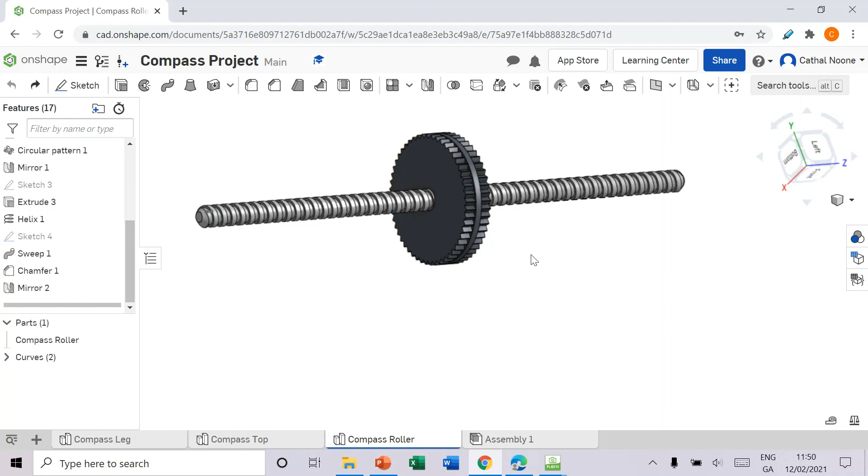Okay folks, so in the last video we had a look at how to make this compass roller, and in this video now we're going to look at two new parts.

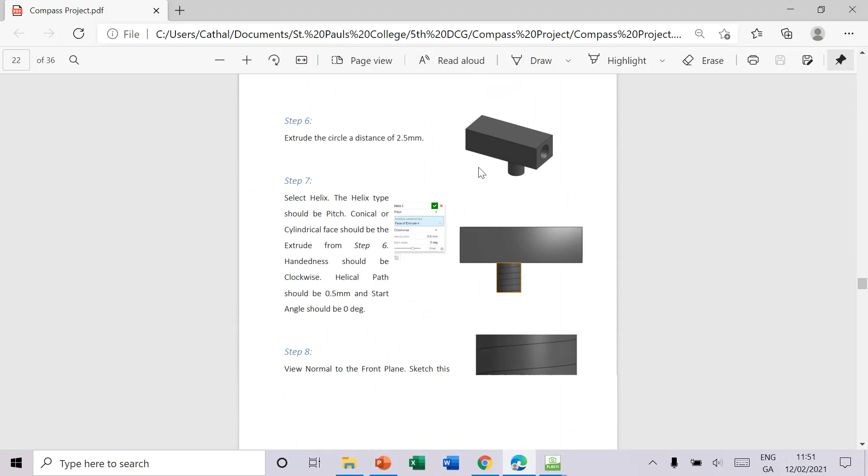So part 4, which is the lead holder, and part 5 then, which is the lead wheel that's going to attach to the holder. Okay, so as usual we're going over to our compass project and we're going to open up a new part studio.

So create part studio, and we're going to be greeted by the 3 planes and the origin. So the first thing I want to do here now again is just to rename this, and I'm going to rename it after part 4, which is lead holder. So rename lead holder.

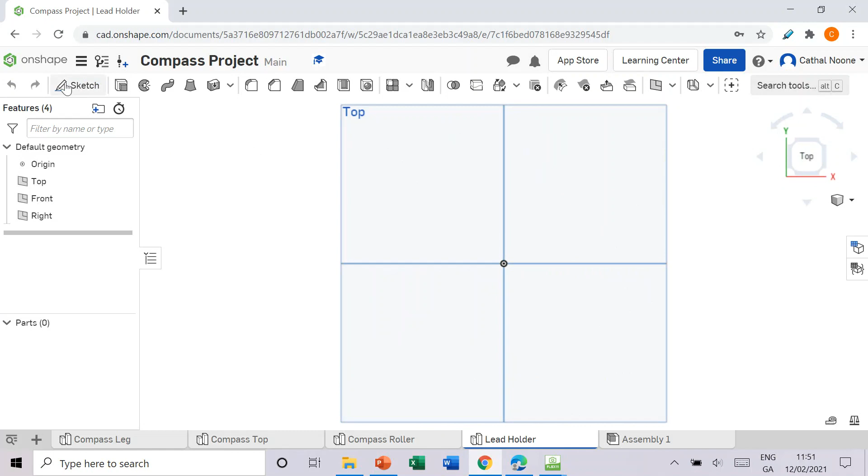Okay, and I'm going to start here now with step 1. So sketch the center rectangle on the top plane, 10 mil by 4 mil. So looking straight in at the top plane, I'm sketching onto the top plane a center rectangle, and that's going to be 10 mil by 4 mil.

Okay, so the shape then turns black once it's fully defined. Green tick. So that's step 1.

Step 2 is to extrude that sketch by 3 millimeters. So I'm going up here to the extrude feature, and I'm going to extrude this sketch by 3 mil. And make sure you hit the green tick once you're done.

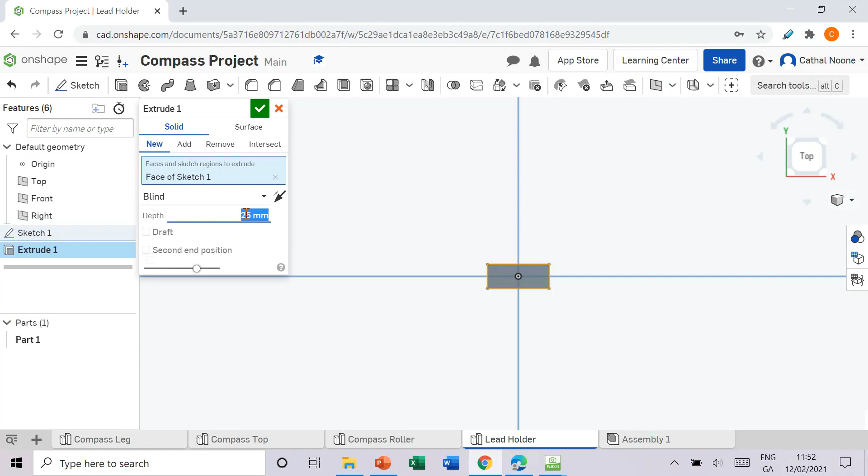Okay, so you can see now we have a cuboid shape here, and we'll be moving on to step 3. So all very basic so far. Look normal to the left of the shape and sketch a radius 1 millimeter circle on the center of that surface.

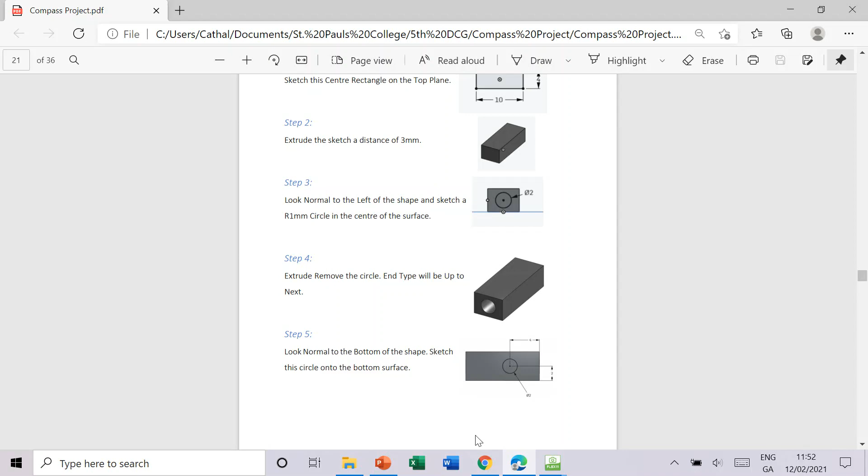Okay, so if we go over to our shape here, we can see we have looking in at the right, and we also have looking in to the left. So we're asked here to look in at the left, and we're asked to sketch onto that surface, sketching a circle.

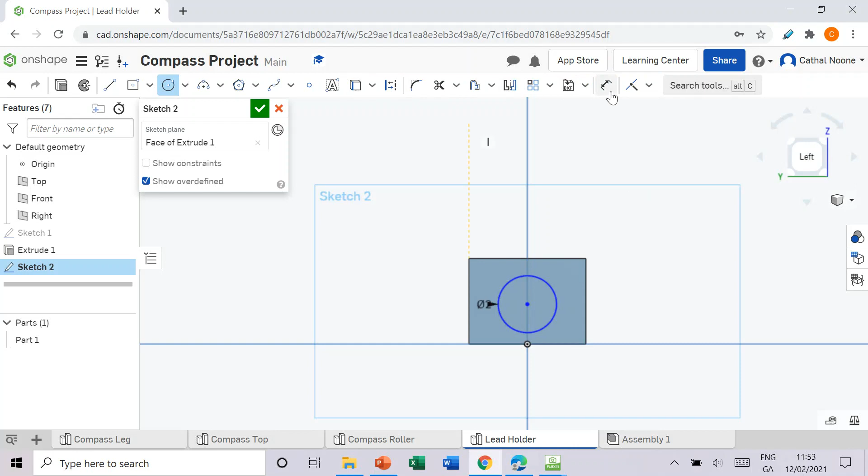Of radius 1 millimeter. So I can go up here now to dimension that, and it's going to be a diameter of 2. The final thing I want to do is make sure that that's centered on the shape, so the distance from here to here should be 1.5 mil. Okay, green tick once we're finished that, and we can see now that we've sketched onto that shape, that circle.

Okay, step number 4, extrude, remove the circle. End type would be up to next. So I'm going up here to extrude again, and I'm extruding this shape.

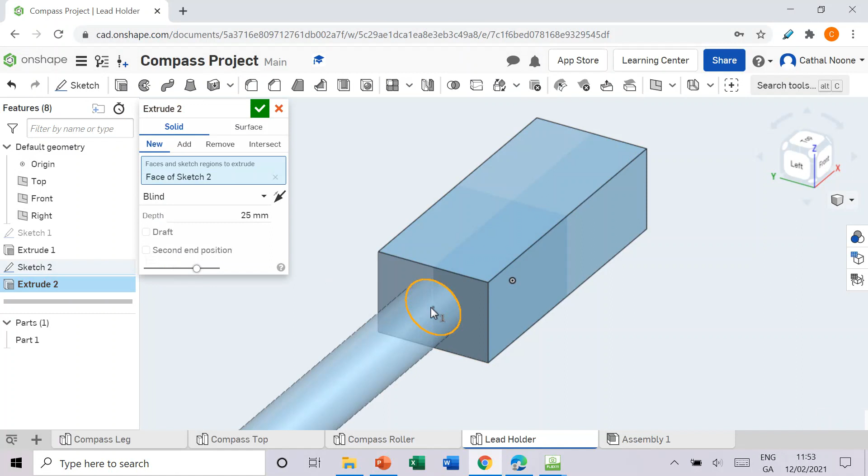And by default now, it's extruding and adding. I don't want to add, I actually want to remove, so make sure you're clicking the remove button. And they said that the end type was up to next, so it's going to go up to the next surface, which is the surface here on the other side. Green tick once we're finished that.

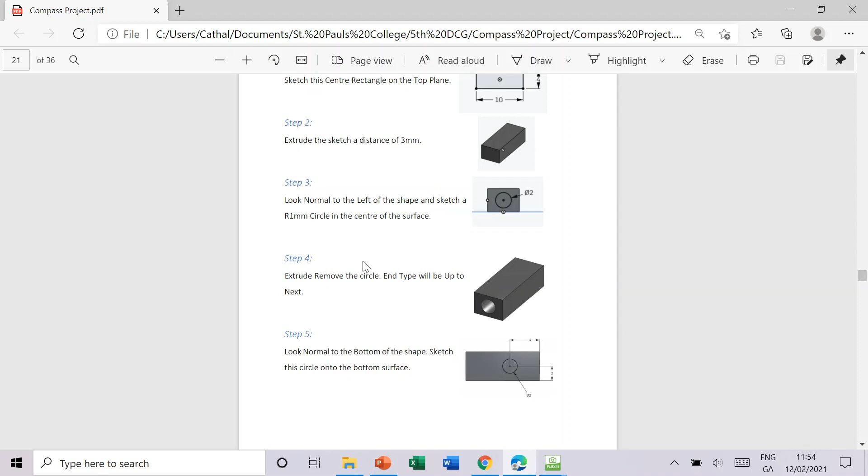Okay, back to our document. Step number 5. Look normal to the bottom of the shape and sketch this circle onto the bottom surface. So we see here again we have this diameter 2 circle, that's 4 mil away from this edge and 2 mil away from this edge.

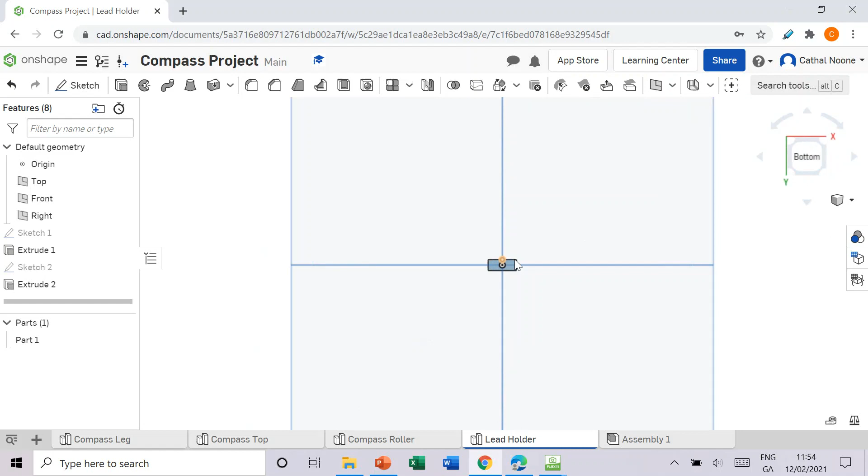So again, looking at this shape here, we want to look straight in at the bottom, they're saying. Okay, so when we look at the bottom, this is what we see, and we know that we want to sketch a circle onto this.

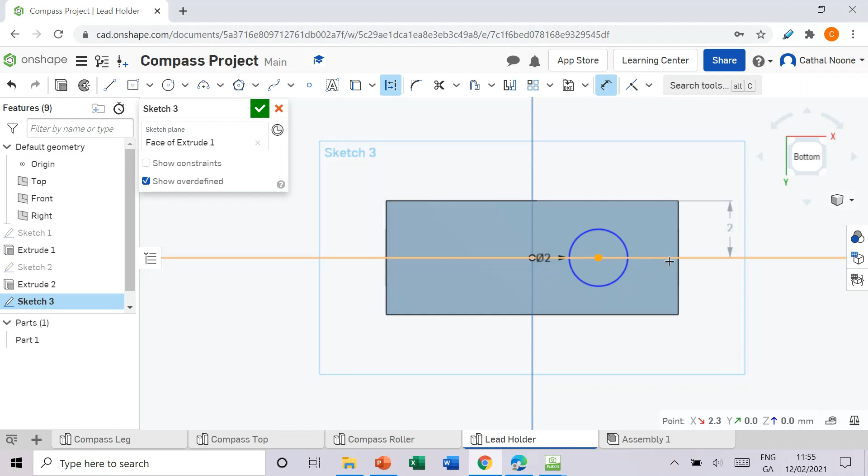So again, the diameter of that circle is 2 mil. The distance from here to here is 2 mil, and the distance from here to here, as far as I remember, was 4 mil. Okay, green tick once we're finished that, and now we see that we've drawn a circle onto that bottom surface.

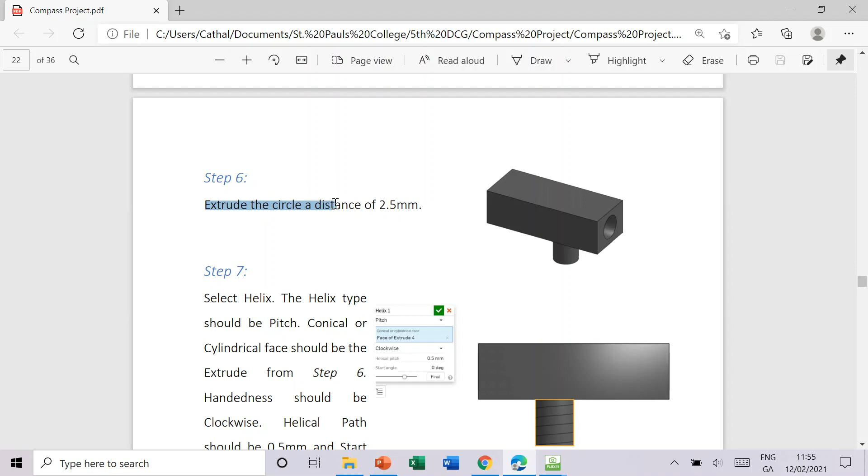Step 6 is to extrude the circle a distance of 2.5 mil. So grabbing that circle, pressing extrude, and extruding it by 2.5 mil. So we're adding this time, not removing, and we're going to get a shape like that coming out at the bottom of it.

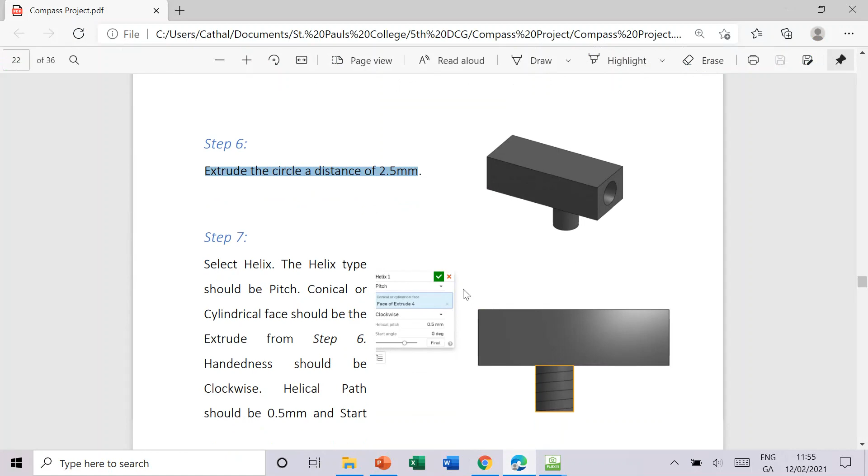Okay, step 7 is to select helix. We know where that is from the previous videos. The helix type should be pitch, conical or cylindrical face should be the extrude from the previous step, which was step 6. Handedness should be clockwise, helical path should be 0.5mm, and start angle should be 0 degrees.

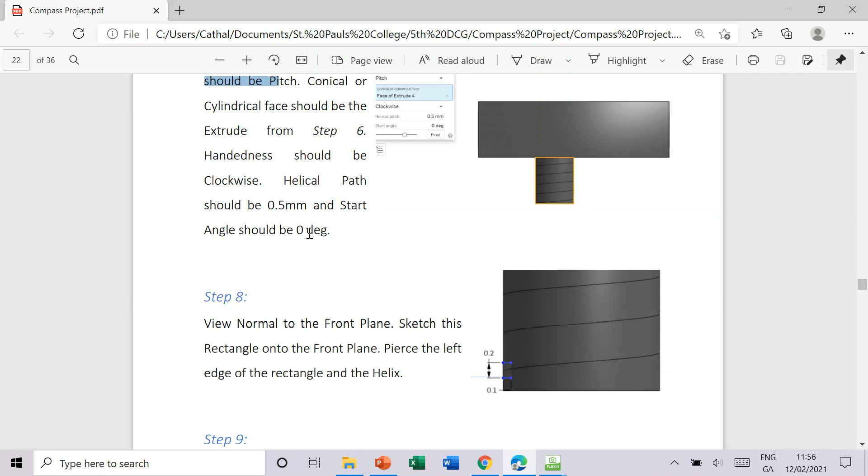Okay, so a lot of information there, but we're going to go here to helix, plane, and selecting this as the conical surface. And we see we'll start to get a helix there.

Next thing we want to change is that it's not turn, we want to change the pitch, and we want to change that pitch to 0.5mm. Okay, so we get a nice tighter helix here.

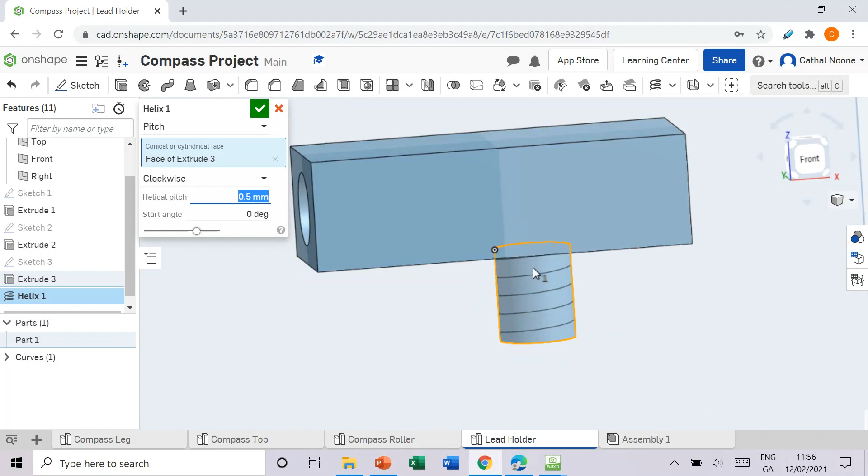Okay, so the lower that number gets, so if we start bringing that down to say 0.01, the tighter together them curves will get. But we want it to be 0.5. Okay, so that looks pretty good to me.

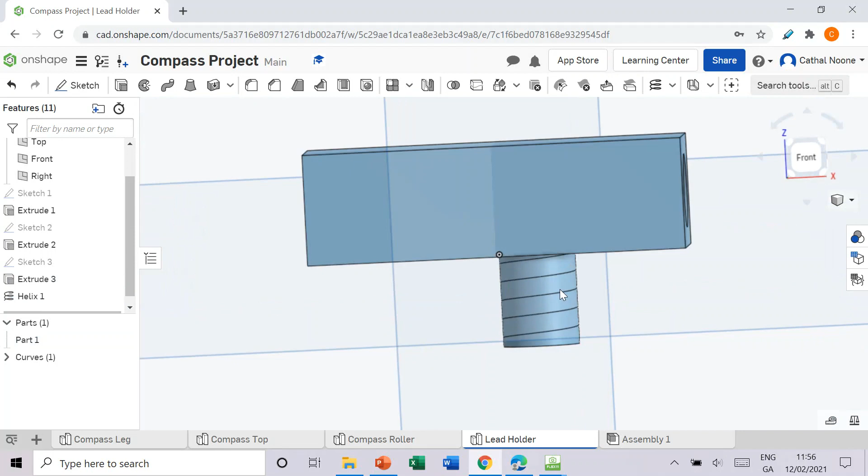View normal to the front plane and sketch this rectangle onto the front plane. Pierce the left edge of the rectangle and the helix. Okay, so we have a 0.2 by 0.1 rectangle there.

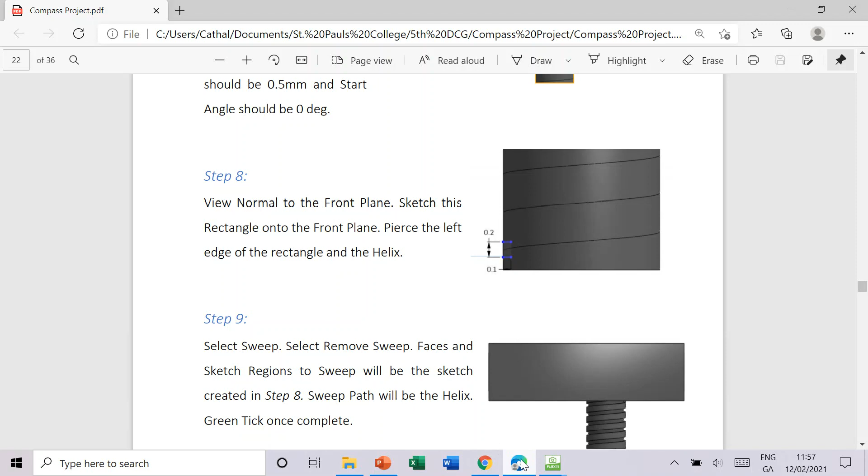So what we want to do is go normal to the front plane, and we're going to zoom in. We're zooming in to this spot here, over to the left side of the shape where the bottom helix is. If we see the curve, it's kind of starting here and it's going to go over to this point, and this is the point we're looking for.

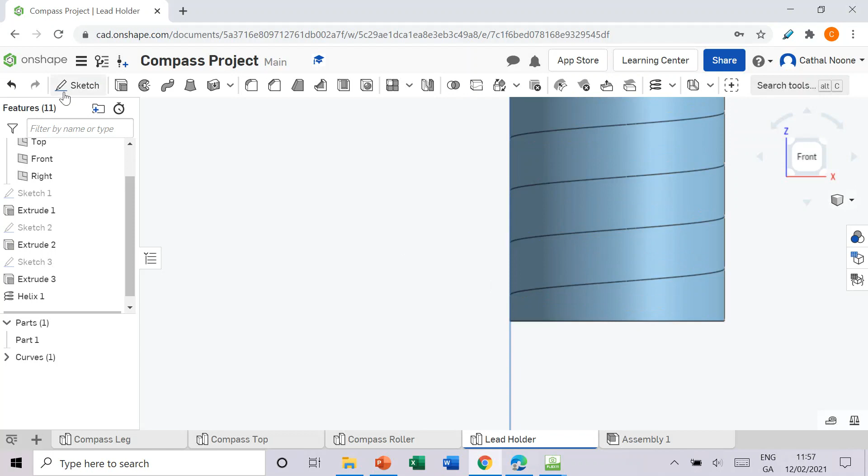And we want to sketch here, onto the front plane. What we're sketching is a corner rectangle. So zoom in here good and close for yourself, and I want to just sketch a corner rectangle like that. That's going to be 0.1 by 0.2.

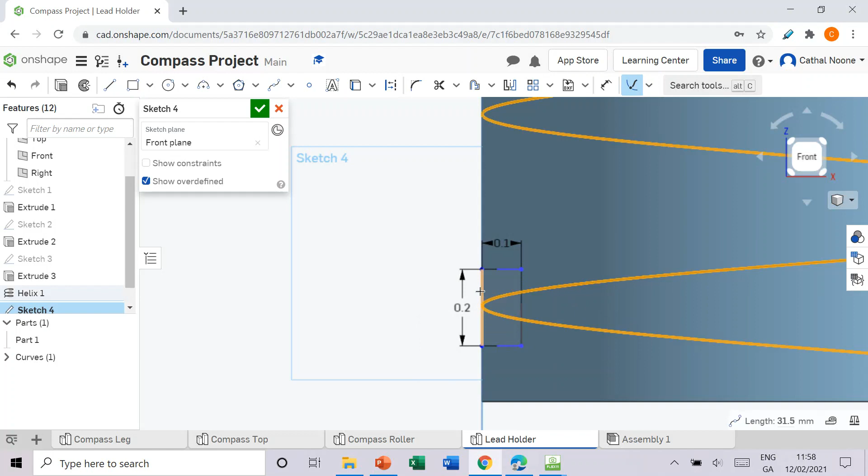The next thing I want to do is choose this feature here, which is pierce. I want to pierce this line with this edge here. And they're going to now pierce each other, which means that this helix and this line are actually joined together now.

So I'm going to get out of that relation, and I'm just going to center up this by eye. This doesn't have to be all that accurate, but just center up that line with the helix. Once you have it centered, you could dimension this if you want to 0.1, but I'm just going to leave it like that. Okay, so that's nicely centered for me. Green tick once I'm finished that sketch.

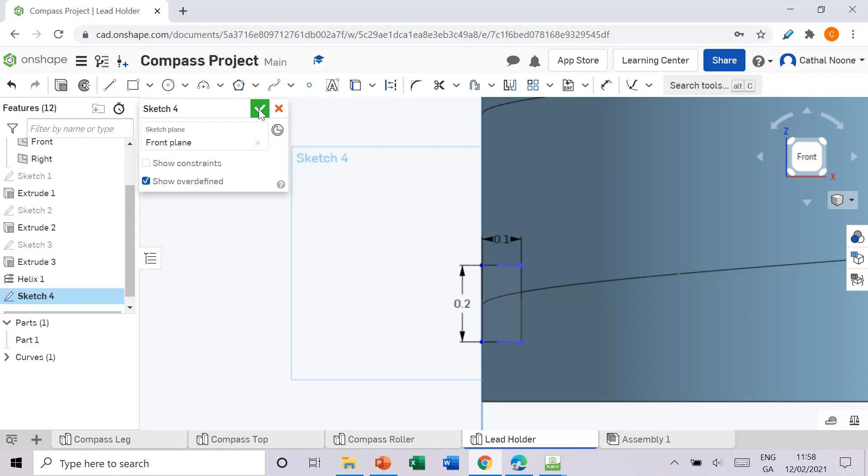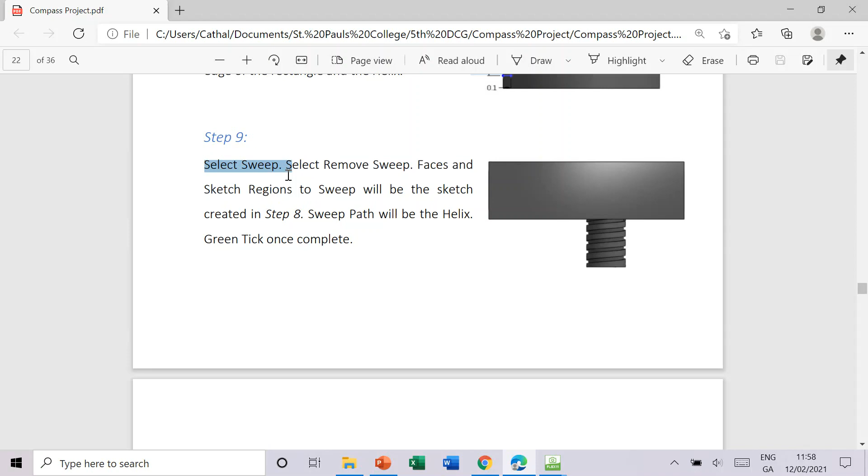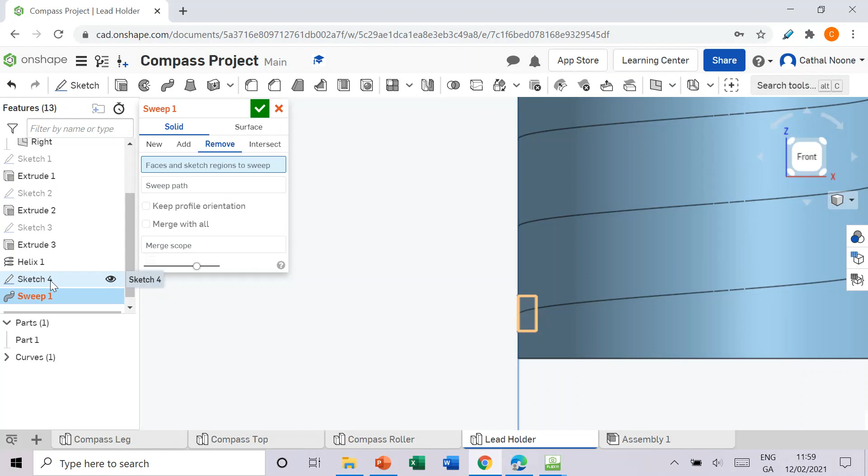Step 9 is to select sweep, select remove sweep. Faces and sketch regions to sweep will be the sketch created in step 8. Sweep path will be the helix. Green tick once completed. So we're going up here to this feature, sweep, and we are going to remove. The faces and sketch regions to sweep will be this sketch from the previous step. The sweep path will be the helix, and green tick once we're finished.

So you can see now we have it's kind of like a thread on a bolt. One thing I like to do now is just to hide the helix curve. Okay, so we're left with this.

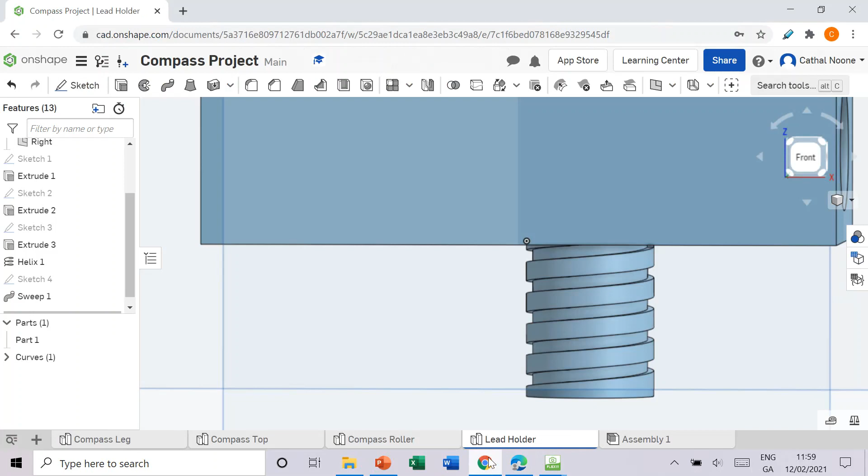Chamfer the end of the sweep. This chamfer distance should be 0.1mm. So chamfer is this tool here, and I'm just chamfering this very bottom surface here, or the edge even. The distance we said was going to be 0.1mm, and that's just going to kind of grind down the bottom of that screw. You'll often see that.

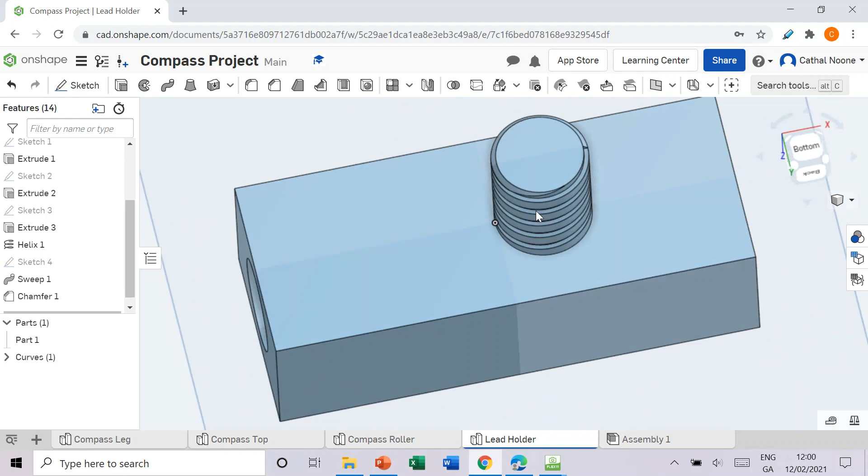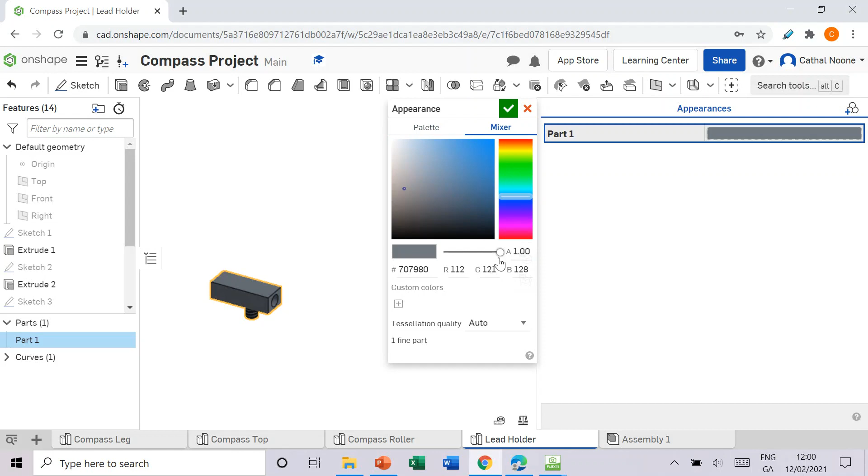The last piece, step number 11, is just to edit the appearances of that object. One thing I like to do is just to hide the origin and the 3 planes, and then over here to appearances, double click on the current color, which is this blue, and I'm just going to change it to a darker shade of grey. You also have this Palette, Mixer as well that you can go through, and you can get whatever colour you like to colour it.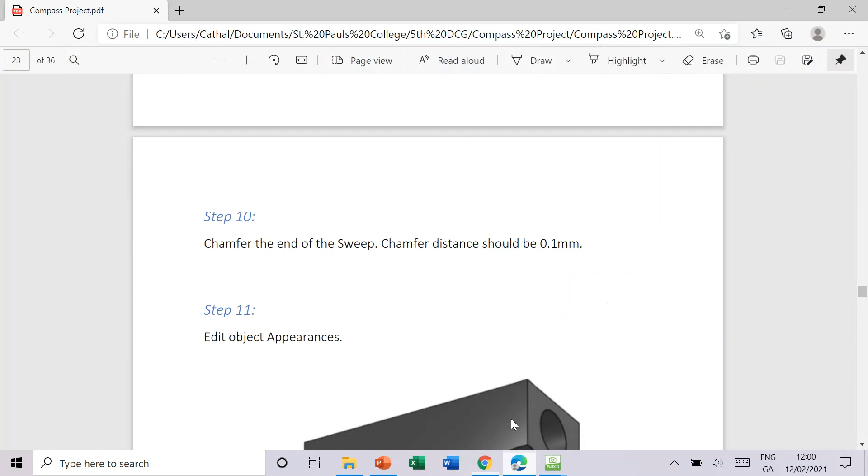And that is the lead holder now finished. So again, we're going to do 2 parts in this video, and the next part we're going to do is part number 5, which is this lead wheel.

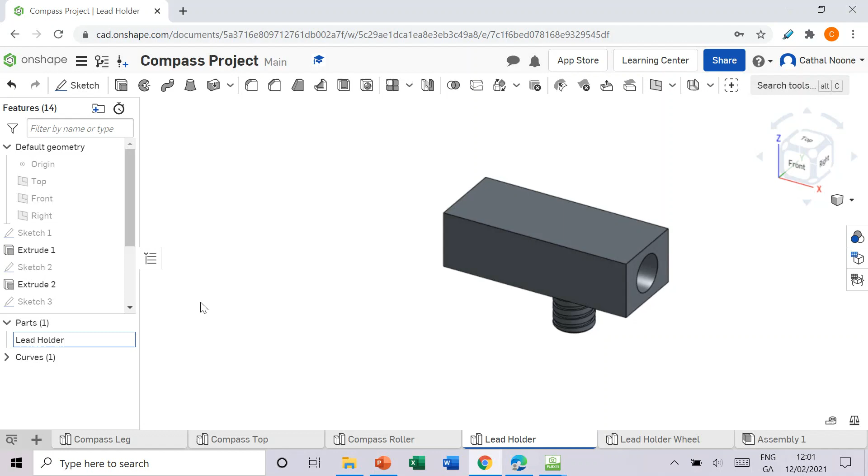So before we begin that, we need to open up a new part studio and rename that compass or lead holder wheel. One thing I also do is, because this is called the lead holder, I'll also change this to lead holder as well. Okay, so lead holder wheel.

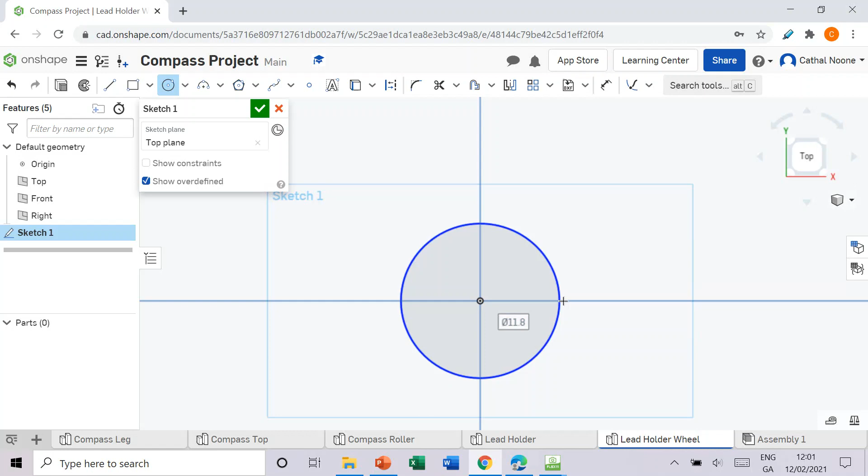Step 1 is to sketch a radius 2.5mm circle with the origin as its center. Okay, so that's going to be a diameter 5. So sketch onto the top plane a circle with a diameter of 5. Green tick once we're finished that. Extrude, so step 2, extrude the circle a distance of 2mm to create a cylindrical shape.

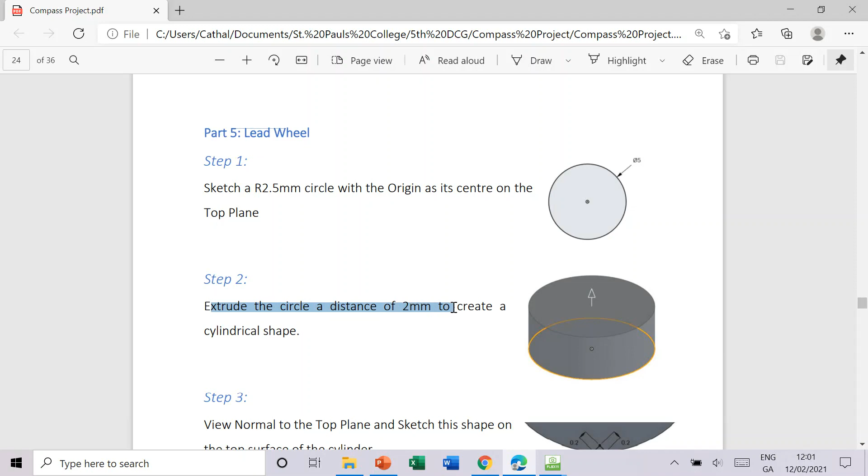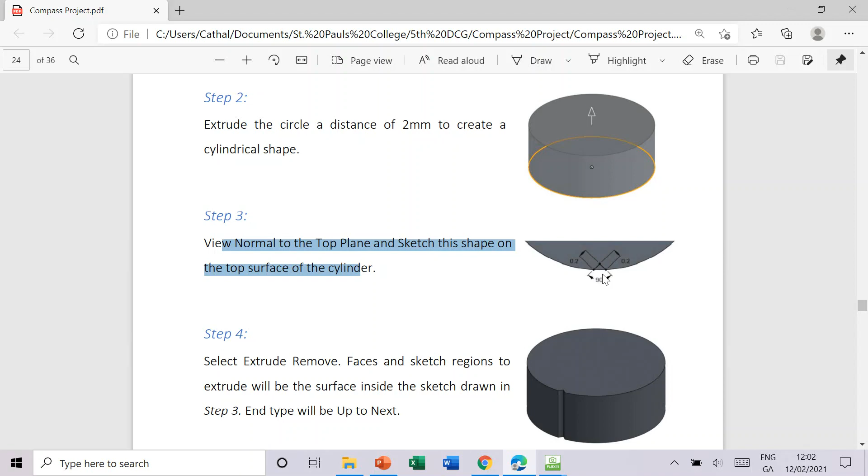Okay, and we're going to get a shape like that once we extrude it by 2mm. View normal to the top plane and sketch this shape onto the top surface. So we have 0.2, 0.2, and 90 degrees here. Go normal to the top and start a sketch.

So we're sketching onto the top plane and we're going to sketch a line. I'm going to start just down here on the circumference anywhere at all, and I'm going to bring it up until I get the indication that it's on the center line. Once I get to the center line, I'm going to click and move down here to the right, and draw another line.

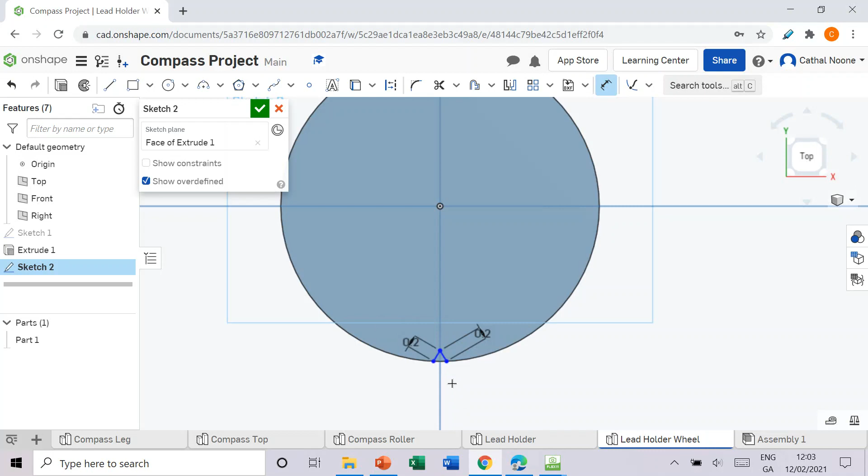Using the Smart Dimension tool, I need this to be 0.2, and I need this to be 0.2. The final thing I want to do is dimension the angle in between, and that angle is going to be 90 degrees. Green tick once we're finished that sketch.

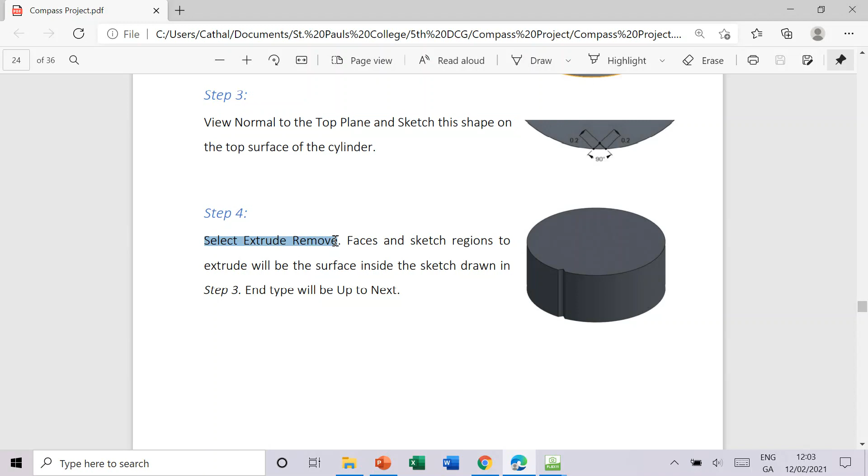Step 4, select extrude remove. Faces and sketch regions to extrude will be the surface inside the sketch drawn in step 3, so inside this surface here. The end type will be up to next, so we're going through the whole shape here.

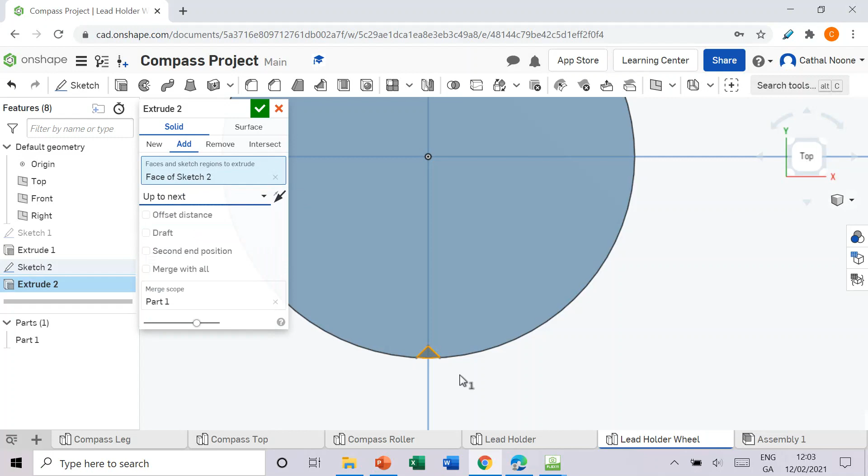So I'm going to click extrude and select this surface here. End type is going to be up to next, so that's going to go all the way through this shape once I press remove. Green tick. Okay, so we can see now we have a cutout of this cylinder.

Select circular pattern. Select feature pattern, which is important - make sure you're picking feature pattern, it won't work unless you pick this one. The feature to pattern will be the extrude remove created in step 4. The axis of pattern will be the circumference of the cylinder created in step 1. The instance count will be 55. Select equal spacing.

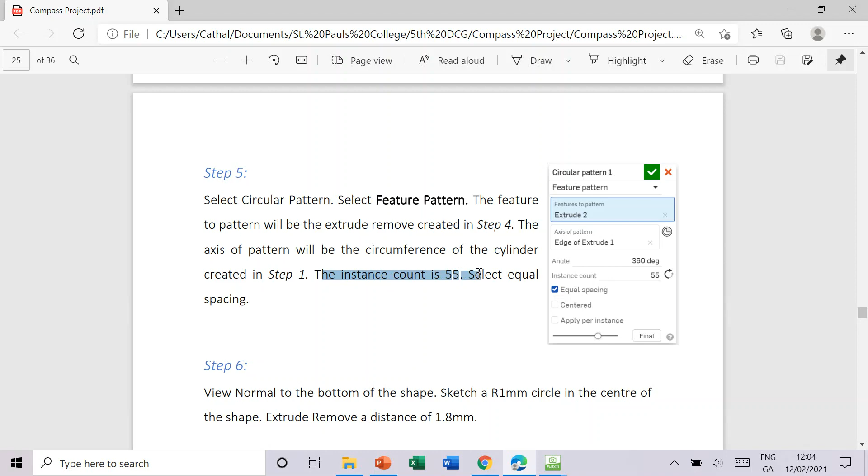So we need to go here to our linear pattern and click the drop down menu to find circular pattern. The very first thing we do is change this part pattern to feature pattern. Features pattern would be the extrude cut from the previous step. The axis of pattern would be the circumference of the cylinder.

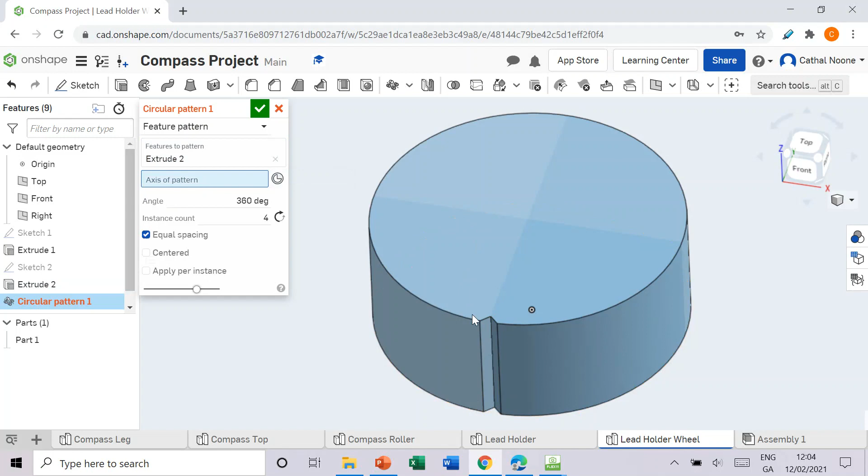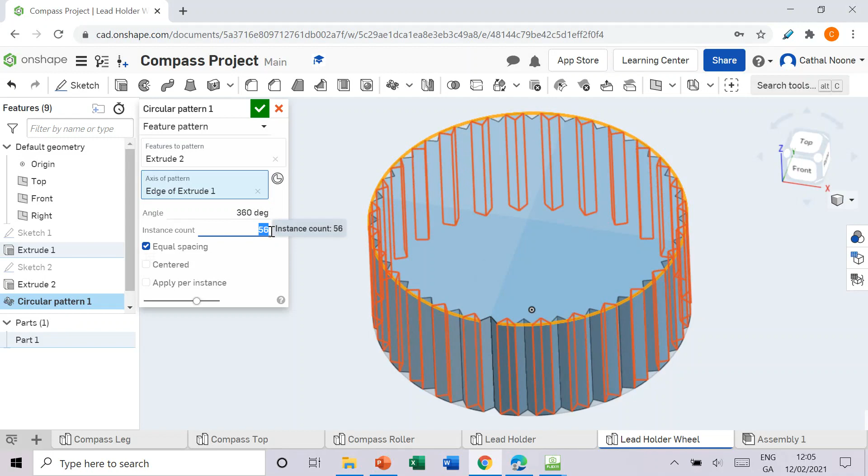Okay, we see now that we have 4 cuts made. We need to start increasing that - the more cuts you add, the more cuts that will appear. And I want to change that to 55. 55 is the max amount of cuts we can make there before it becomes an incomplete pattern, so 55 there is the most we can do.

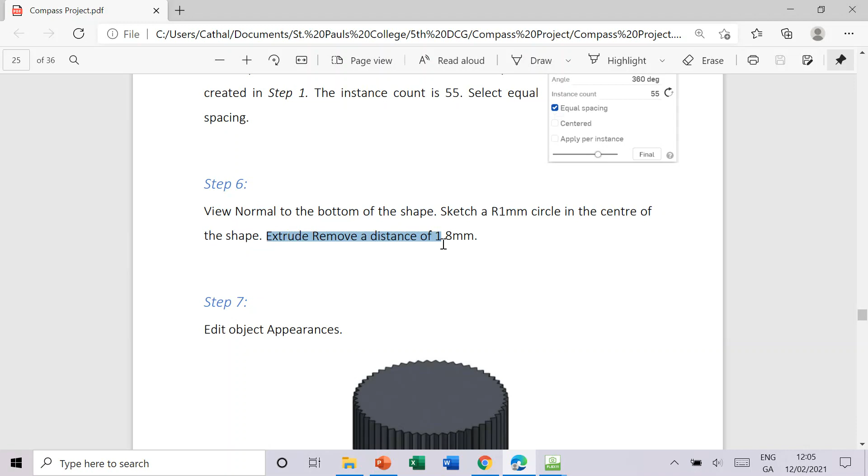So now we get a shape something like that. Okay, step 6. View normal to the bottom of the shape and sketch a radius 1mm circle on the center of the shape. Extrude a distance of 1.8mm.

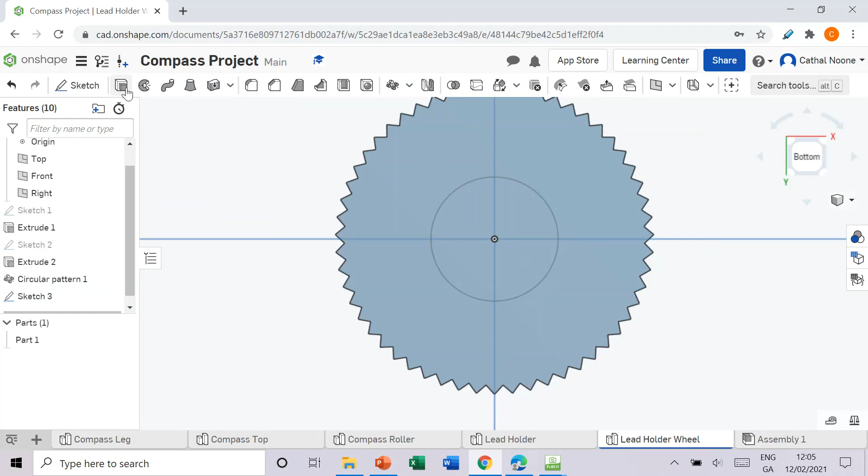So this time now looking at the bottom of the shape, zooming in, and I'm sketching onto the bottom. What I'm going to sketch is a circle, and that circle is going to have a diameter of 2mm. I'm then extrude removing 1.8mm. Make sure you pick the surface that you want to extrude remove, which for me is this surface here. Green tick.

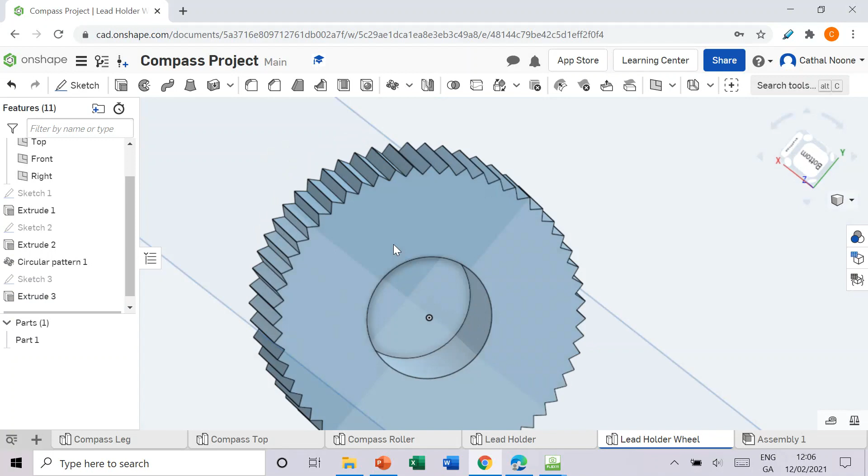Okay, so that's the wheel now that is going to connect to this lead holder. One problem that I had while making this project was I couldn't get the helix thread to appear inside this shape here. I just couldn't get it for some reason, and whenever I did get it, it would cut out a hole from the top.

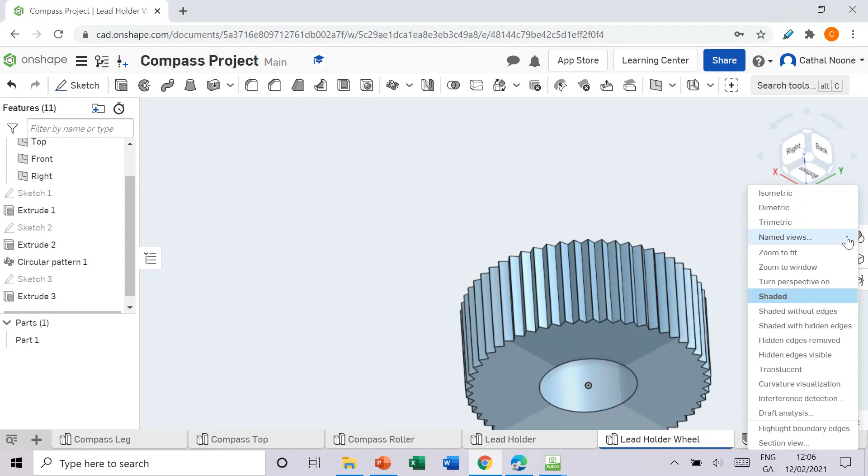So I've just opted to leave it like this. If you did want to attempt it, I would change the transparency to translucent so that you could see through the shape to see what you're sketching on the inside, and I'd probably also suppress the circular pattern so that you can try to draw it on the helix in here if you do decide to do it. But I was happy enough with leaving it as it is.

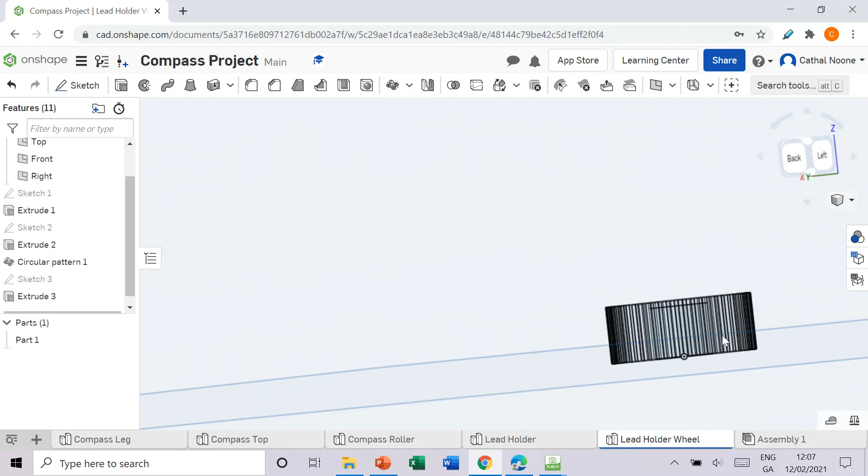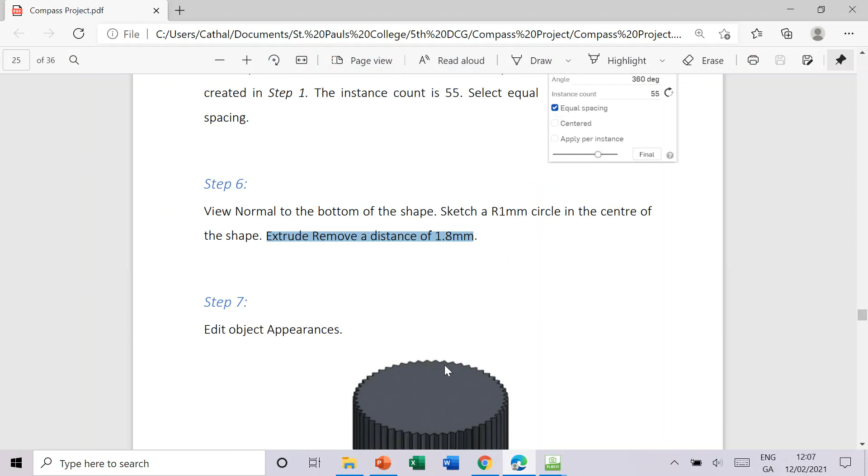Okay, so again, just hiding the planes, going back to the final step, which is step 7, to edit object appearance, and I'm going to give it the same colour that I gave the previous part, which was the lead holder. So I'm going to go over here to my appearance panel, double click on the current colour and change it to this colour here. Green tick once I'm finished, and close that appearance panel.

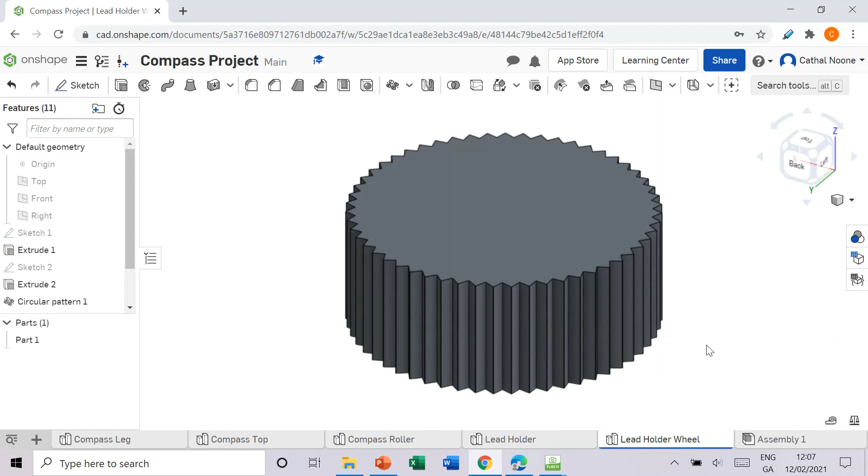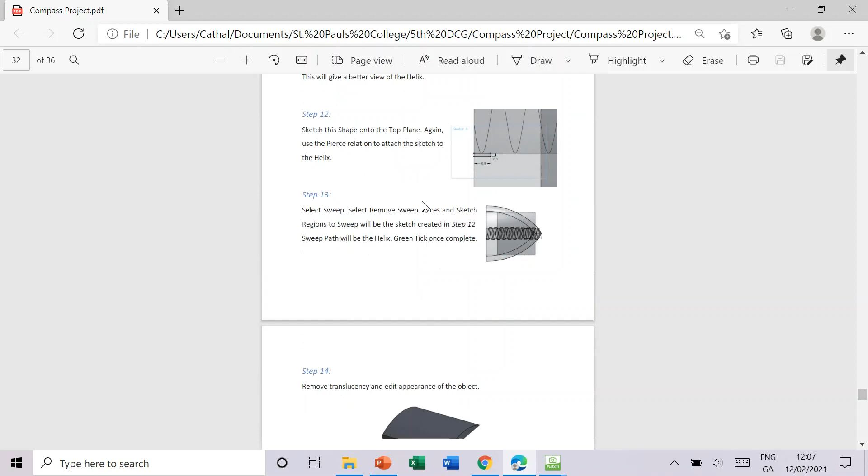Okay, so that's the lead wheel. We're going to be assembling that to the lead holder in the next video - not the next one, one down the line. The next video will look at the spike and the lead and the pin. Okay, so 3 relatively easy parts.